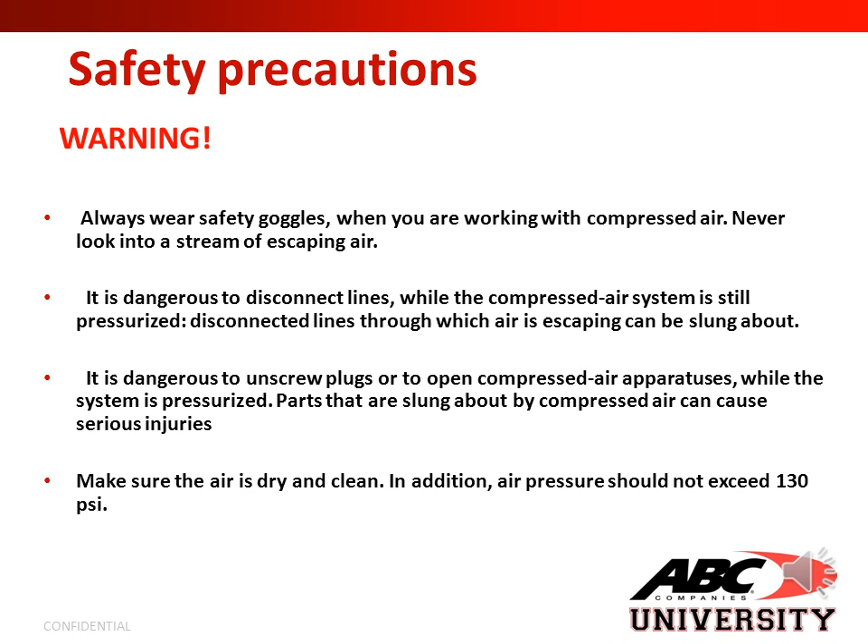Looking at the picture to the left: 1 is your air compressor, 2 is your damper tank, 3 is the purge tank.

4 is your air dryer, 5 is the wet tank, 6 is your safety valve, 7 is your governor.

7 is your governor, 8 is your single check valve, 9 is your overflow valve with limited return, 10 is your ZF Astronic tank.

11 is your trailing axle brake tank, 12 is your drive axle service brake tank, 13 is your front axle brake tank, 14 is your auxiliaries tank.

15 is your emergency park brake release tank, 16 is your overflow valve without return, and 17 is your fill coupling.

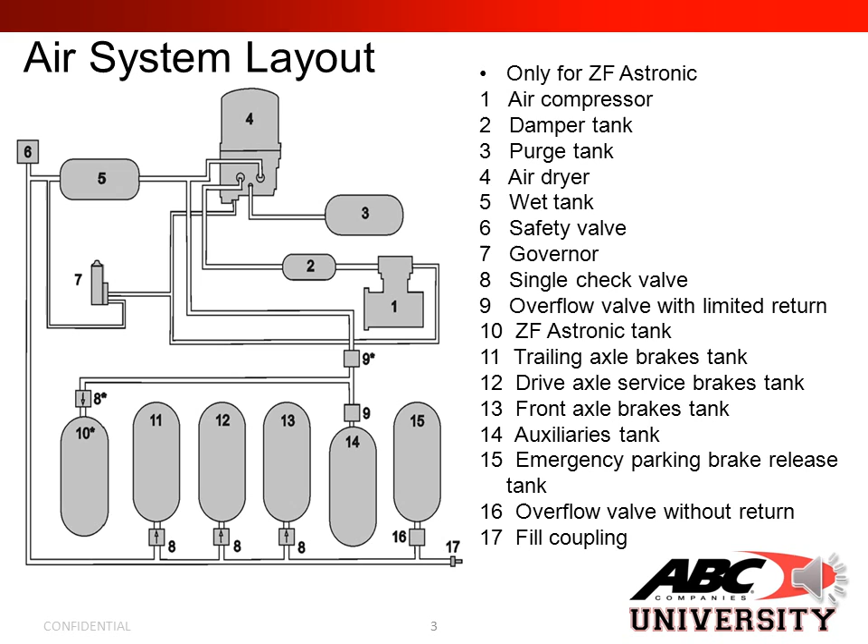Here we show the location of your compressed air tanks. Number 1 is your front axle brakes, 2 is your kneeling system, 3 is your drive axle service brakes, 4 is your accessories.

5 is your wet tank, 6 is your rear raising, 7 is your trailing axle brake.

8, if you have a ZF Astronic transmission, would be your ZF Astronic transmission tank, 9 is your air dryer purge, 10 is your parking brake emergency release.

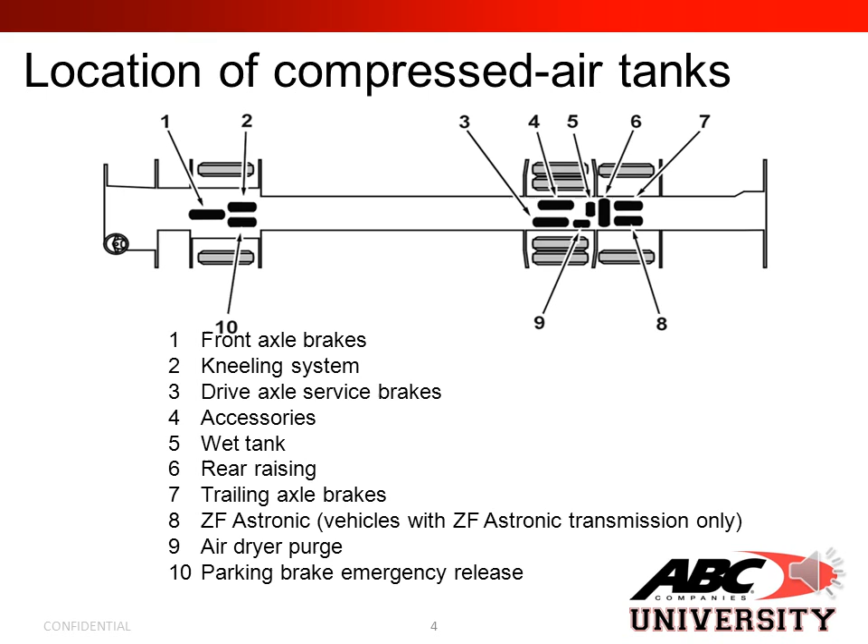To check security of your compressed air tanks, mechanically check the fixing bolts, number 4, for tightness. If necessary, hand tighten the fixing bolts.

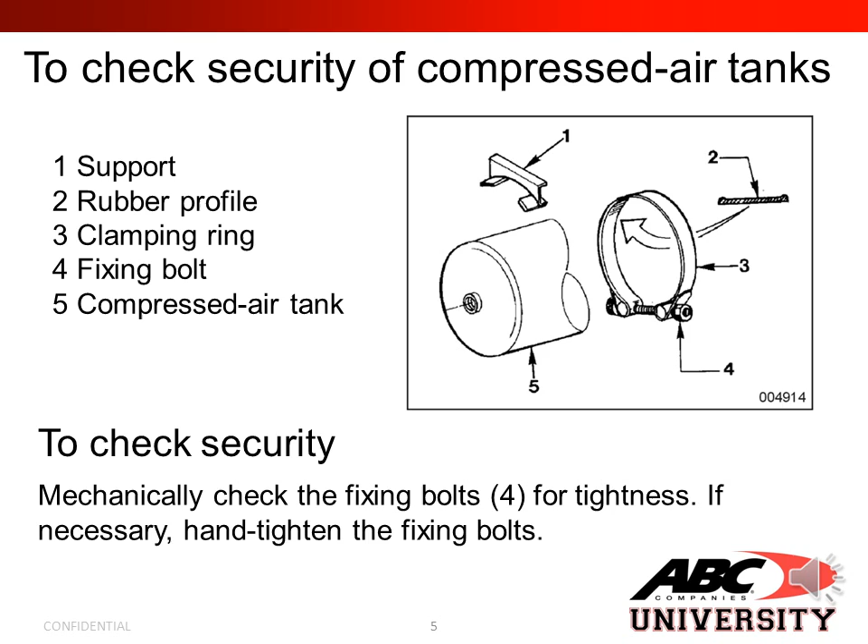Next, to check compressed air tanks for absence of moisture, momentarily open the drain valve of each tank. Only some light mist should escape with the air, meaning the system's air dryer is functioning properly.

If a lot of water or other impurities come out, drain the compressed air tanks completely and change the air dryer element.

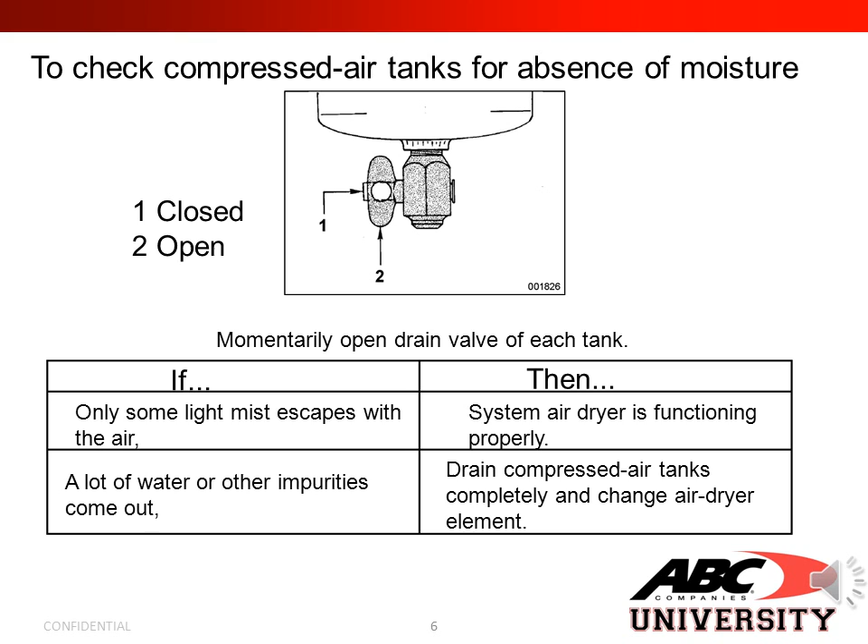In this slide, we show you the basic air compressor cutaway view.

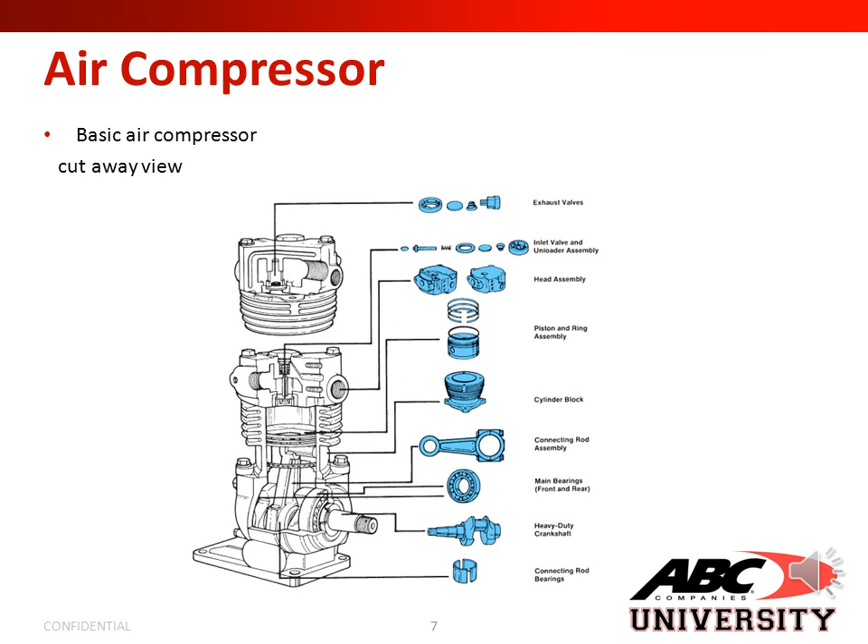To check your air compressor discharge line for carbon deposit: first, release pressure from the air system by actuating the drain valve on the wet tank. Next, disconnect the discharge line from the air compressor.

Step 5: check the condition of the air compressor, the lines and couplings further up in the compressed air system, up to the air dryer and the governor, for excessive carbon deposits.

If necessary, clean and replace lines and couplings. Step 6: install the discharge line to the air compressor.

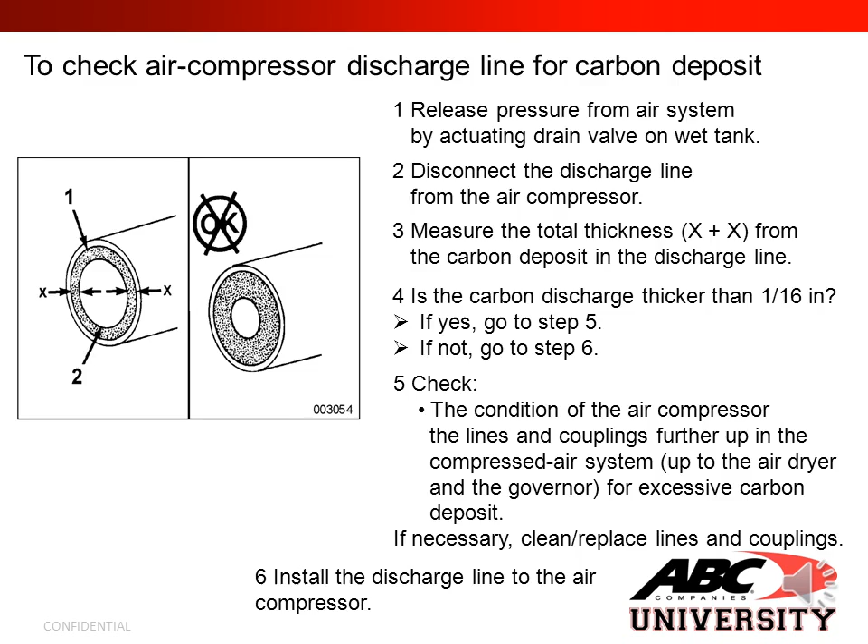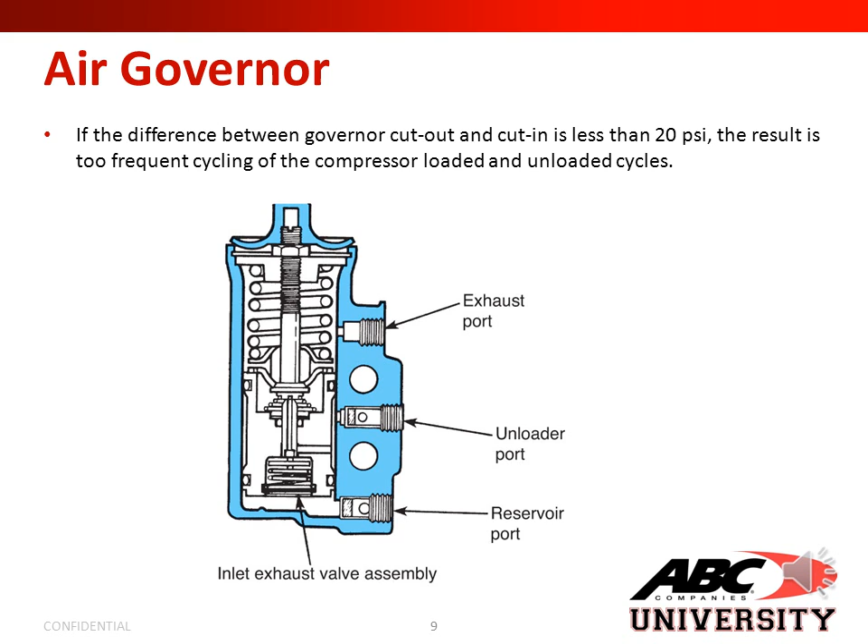To check your governor operation, step 1: connect a pressure gauge with a range of 145 psi to the fill coupling of the compressed air system.

As to the location of the fill coupling, refer to access doors and controls at the outside in your maintenance manual.

Start the engine to build pressure in the compressed air tanks. Filling should be effected at 1,000 to 1,500 RPMs. Follow pressure buildup on the gauge and note the pressure reading at the point where the governor switches off. Compare this value with the cutout pressure values in your technical data and maintenance manual.

Step 5: have the engine idle and keep an eye on the pressure gauge. Try to get the pressure in the tanks to drop back to 105 psi by pumping the brake pedal, waiting a few seconds after each time you depress it.

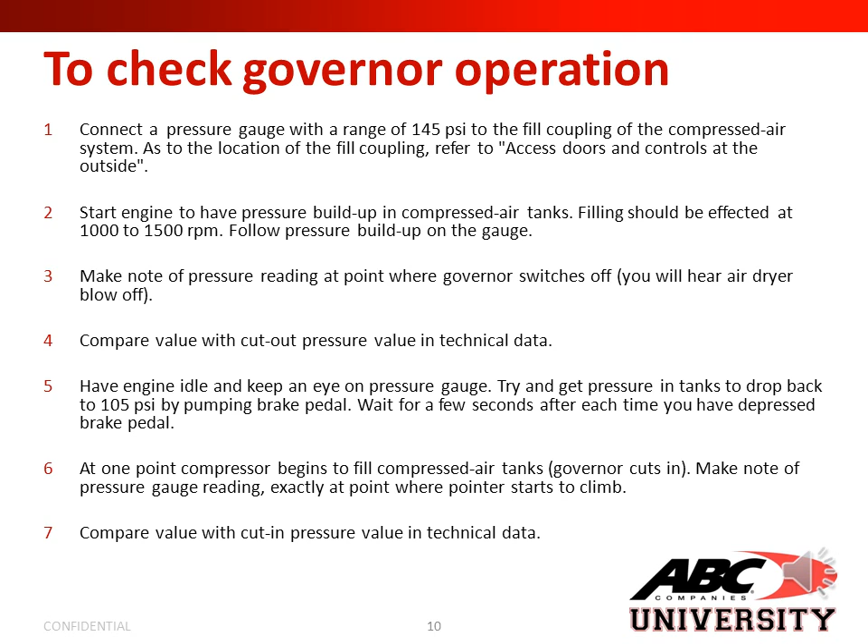At one point, the compressor begins to fill the compressed air tanks as the governor cuts in. Make note of the pressure gauge reading exactly at the point where the pointer starts to climb. Step 7: compare this value with the cut-in pressure values in the technical data in your maintenance manual.

This is an example of the technical data values for your air governor, taken right out of the maintenance manual.

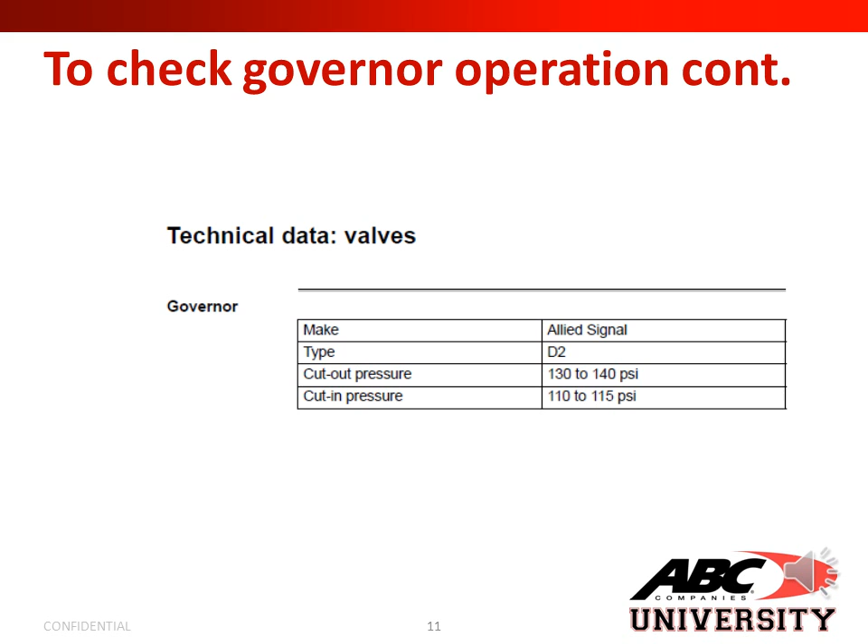Foot valve operation: the foot valve is operated by the driver to apply the service brakes. The driver can control the brake apply pressure by positioning of the pedal.

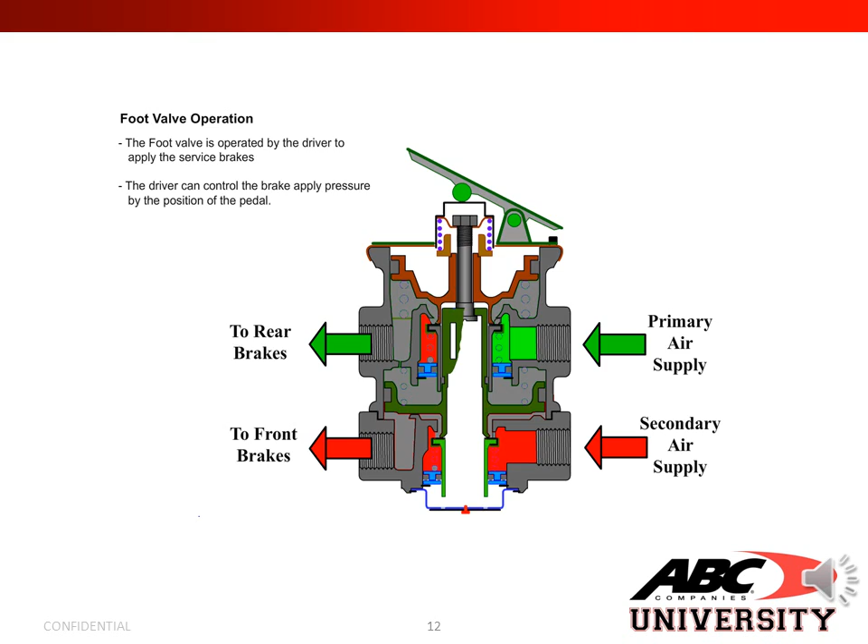When the driver presses his foot down, the treadle valve opens up chambers to allow air to pass through and activate the braking system. After pressure is released off the pedal, it exhausts the excess air.

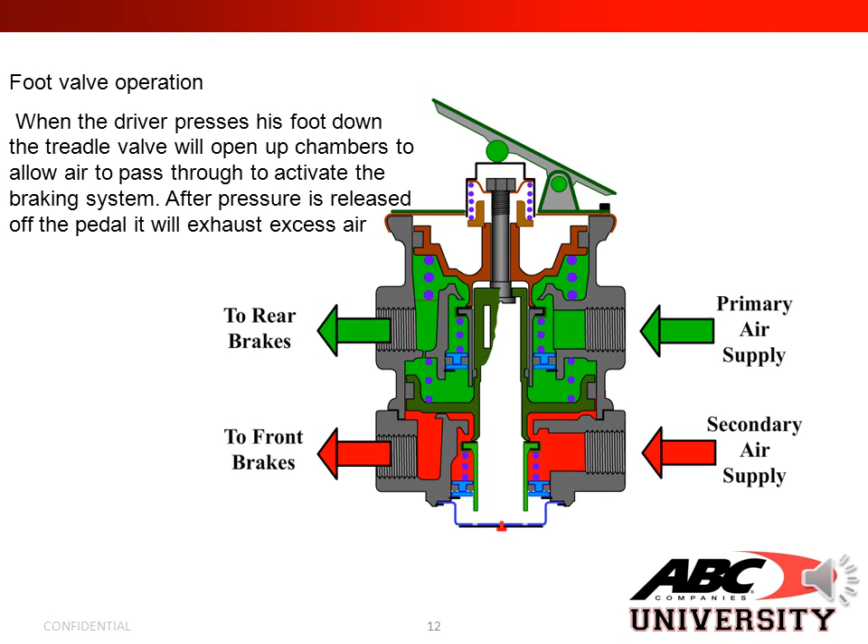Visual identification of valves: first, you have your governor, compressed air tank drain valve, and pressure relief valve.

Next, the single check valve, overflow valve without return, overflow valve with limited return, and fill coupling.

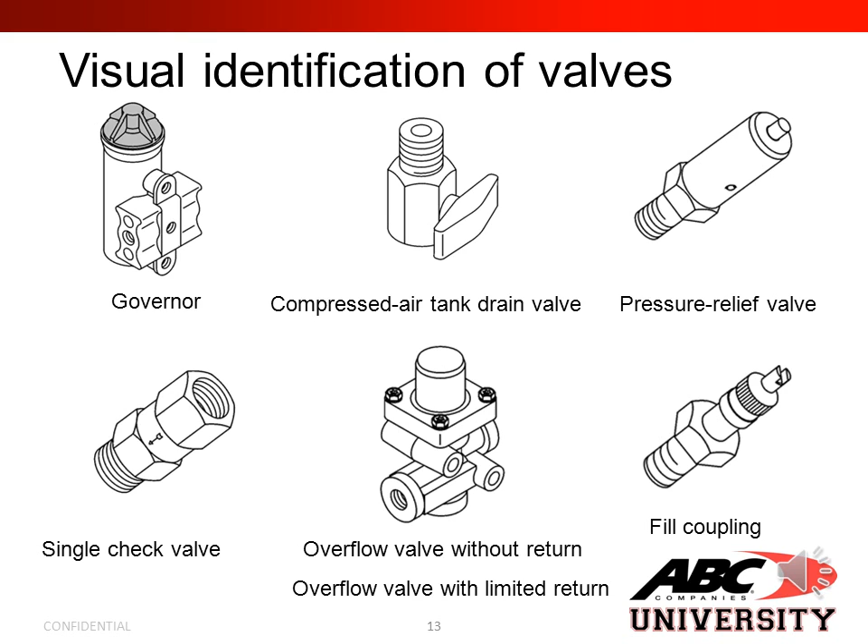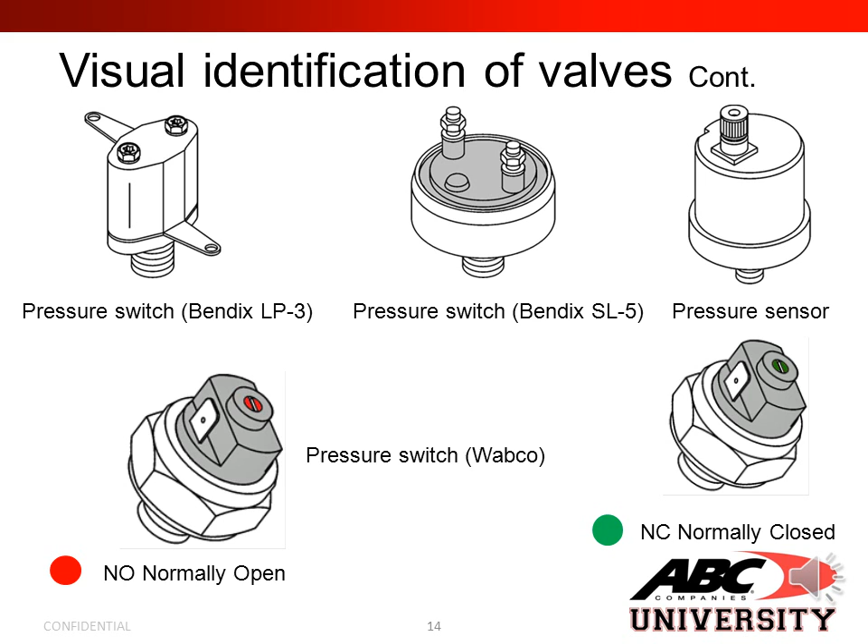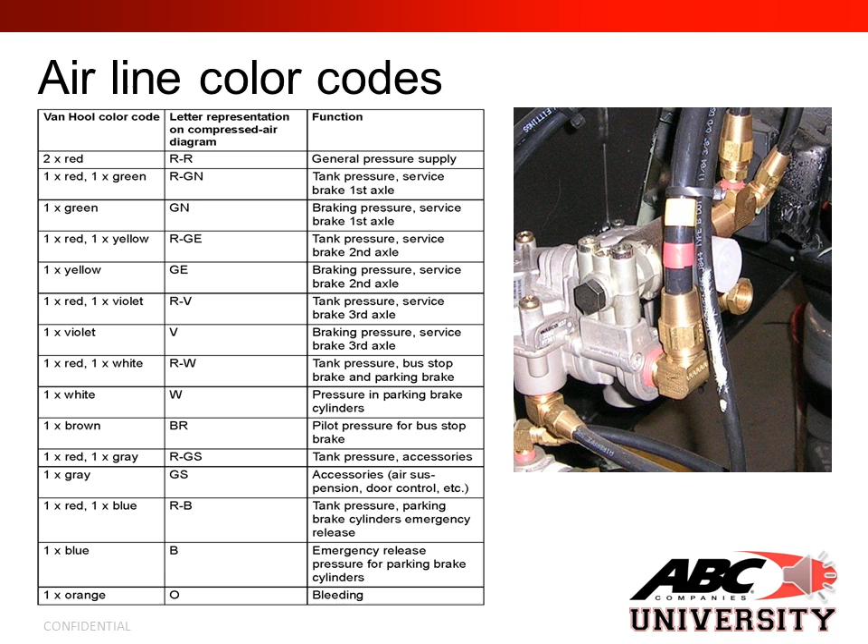In this slide, we show you your air line color codes. This is the Van Hool color code system for air lines on Van Hool coaches. This is an example of air suspense diagram.

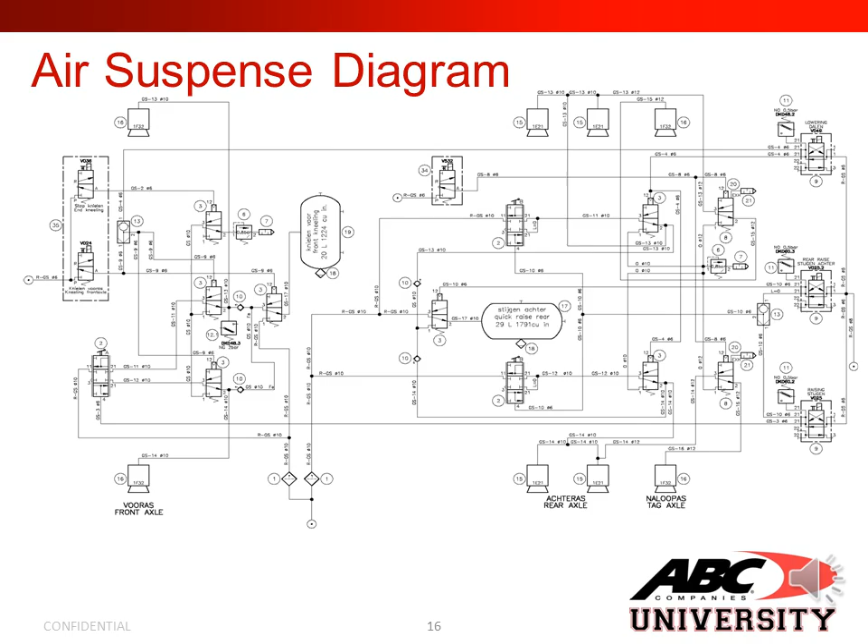In this slide, we're going to show you with animation how the air system works.

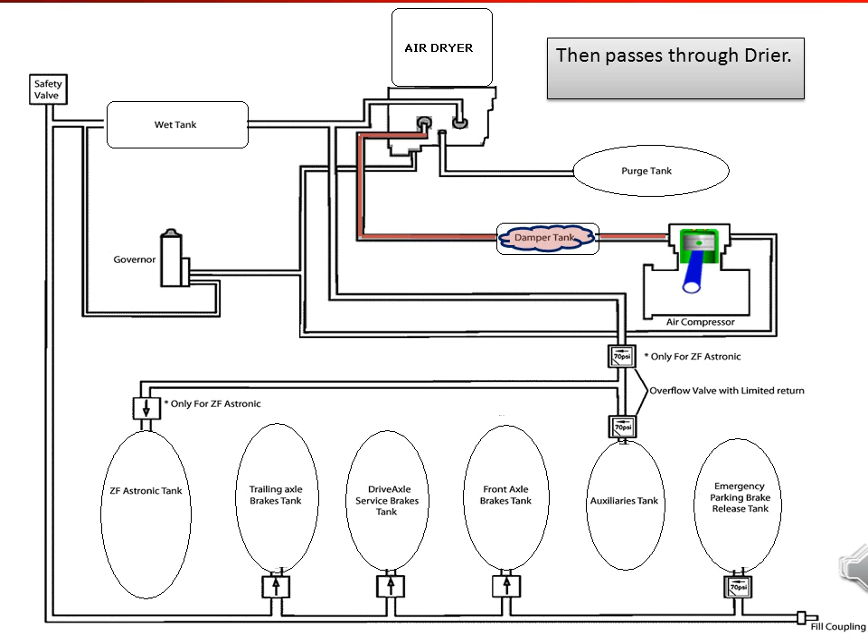First, air enters your damper tank first. Once it fills up the damper tank, it will then pass through the air dryer.

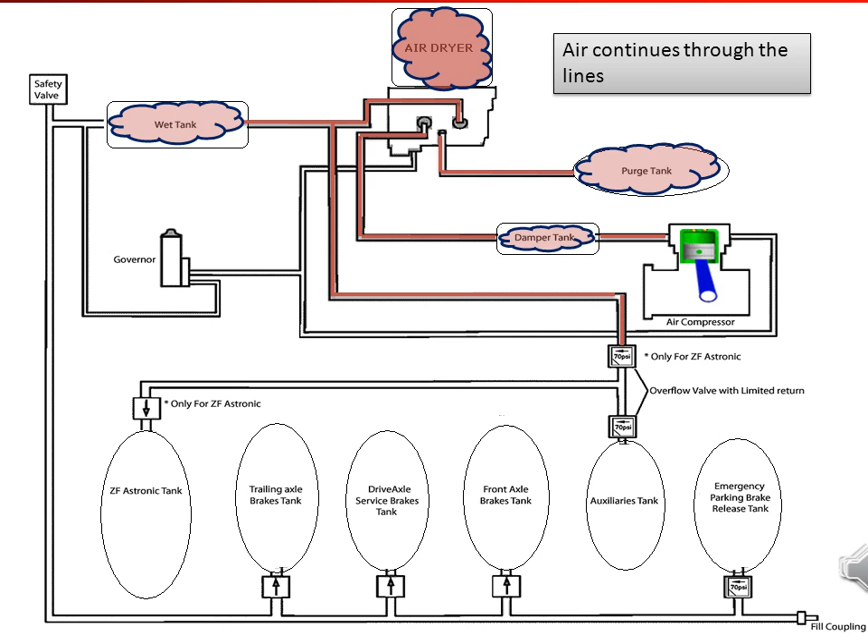Then, air for the brakes passes through the wet tank, and once it fills the wet tank, air will continue through the lines.

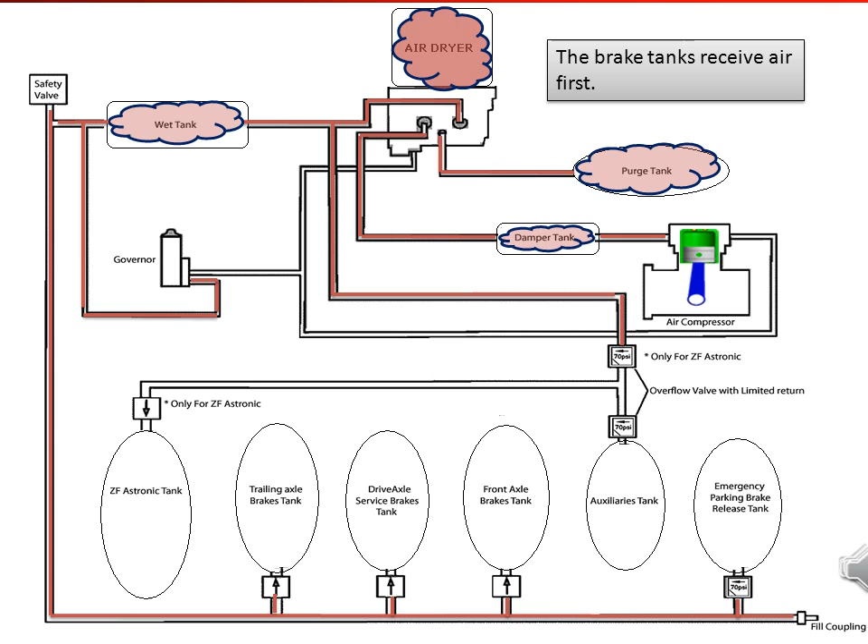The brake tanks will receive air first. At 70 psi, the pressure protection valves will open.

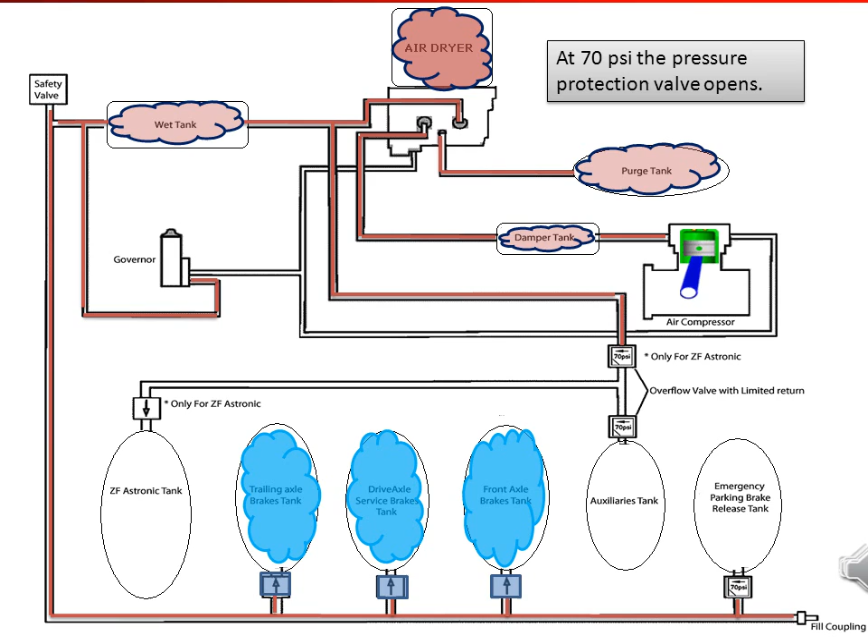Next, your ZF, emergency, and auxiliary tanks will begin to fill.

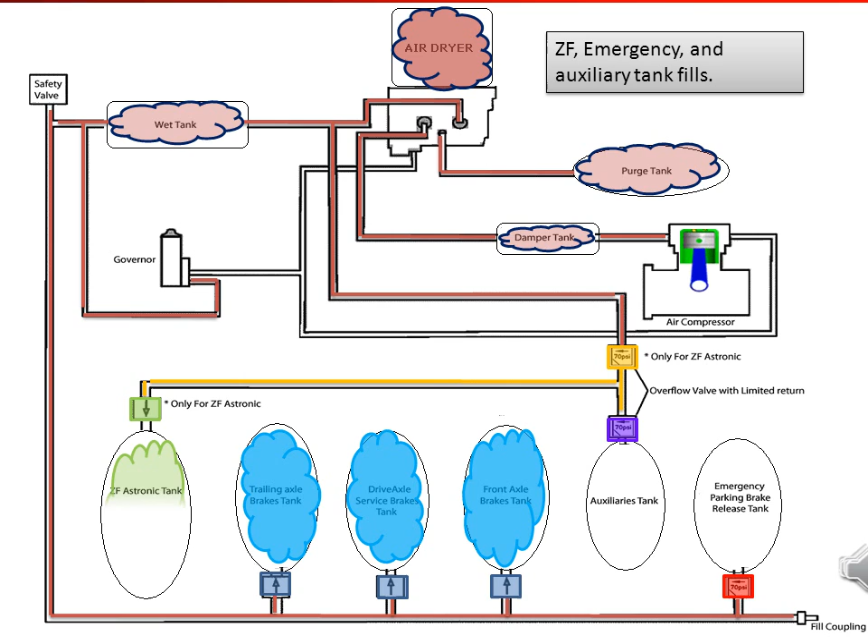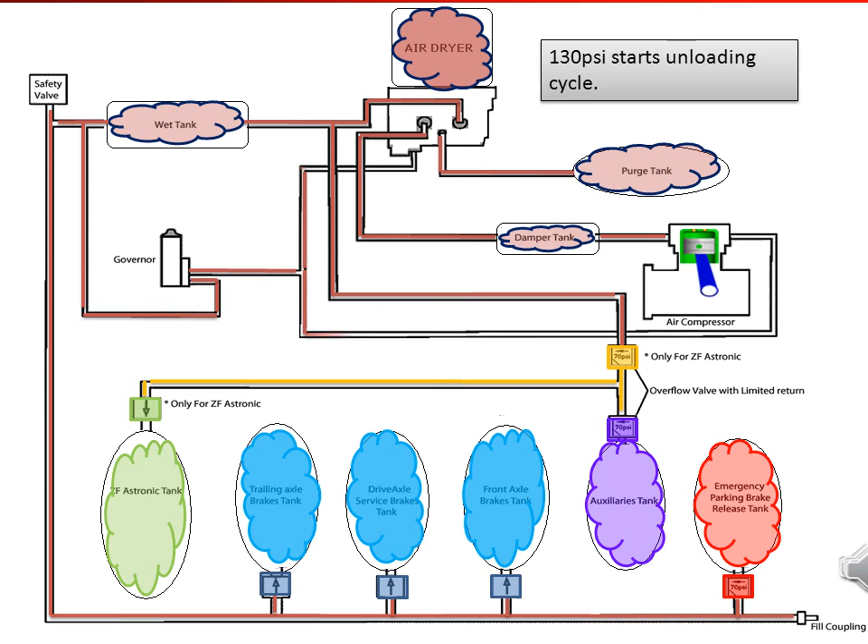At 130 psi, the unloading cycle starts. Then your dryer purges and the compressor stops pumping.